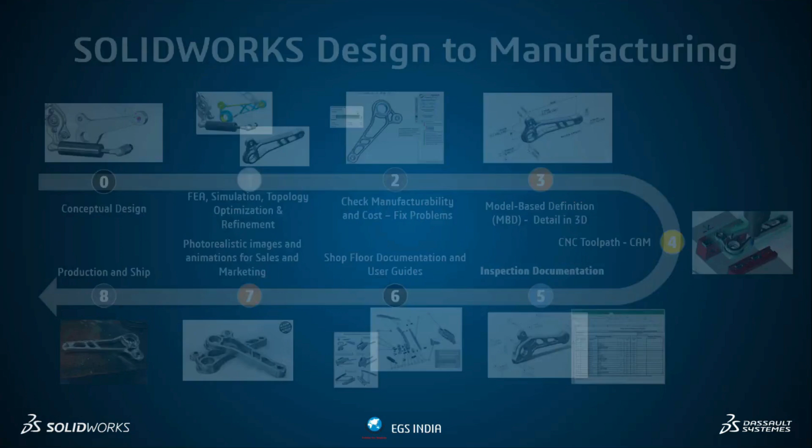And then we have the product we are going to see today, SOLIDWORKS Composer, which helps us to build multiple levels of technical publications such as user manuals, instruction materials, assembly instruction materials, interactive contents, training manuals, etc. So we also have our marketing tool. We call it SOLIDWORKS Visualize, which helps you to create photorealistic rendering images. So overall, for the entire cycle of product development, we have the solutions with us. So we serve across 11 industry verticals.

So today's agenda is going to be how we can maximize the documentation workflow, and how we can improve the timing in that. So some of the bottlenecks we face in the documentation phase of product development, and how SOLIDWORKS Composer is going to help you solve all these small struggles and create better deliverables in a very short amount of time. So I'm going to showcase a few capabilities of SOLIDWORKS Composer, and then we can see the business impact it creates throughout the session. So let's start today's session.

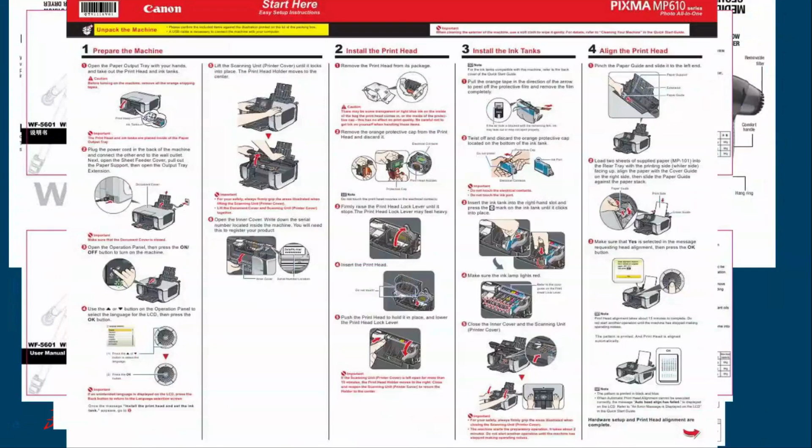For the user manuals or the content, technical publications they are creating, some people take screenshots or type the entire thing. They use different tools for taking different images. Like we may need vector-based images, we may need images with proper instructions built into it. So we might use different tools to build all this.

And then let's see, if there is a scenario where any engineering change has been passed through, you have to go and reiterate everything, verify everything from the beginning, and do the entire manual once again. So the entire previous iteration is not useful anymore. This is a very painful situation.

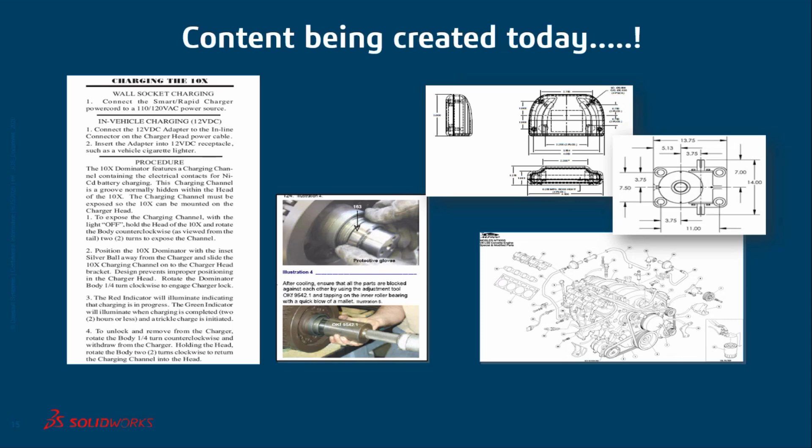This is the light at the end of the tunnel. By cutting out the duplicate work using Composer, teams are getting their product to market three times faster than the traditional manual way. Using Composer, you can create all these technical deliverables in a much faster manner.

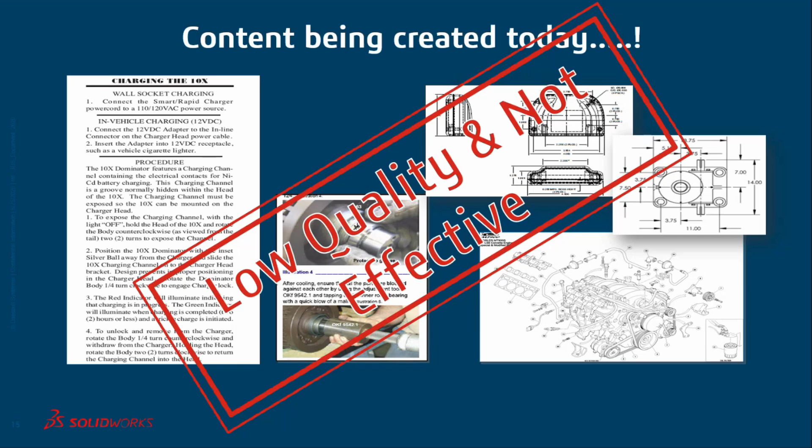So why create low quality work that's not so effective when change comes? All the hard work we put inside our documentation is completely going to waste. So why deal with so much pressure, and why do all these things, when we have SOLIDWORKS Composer?

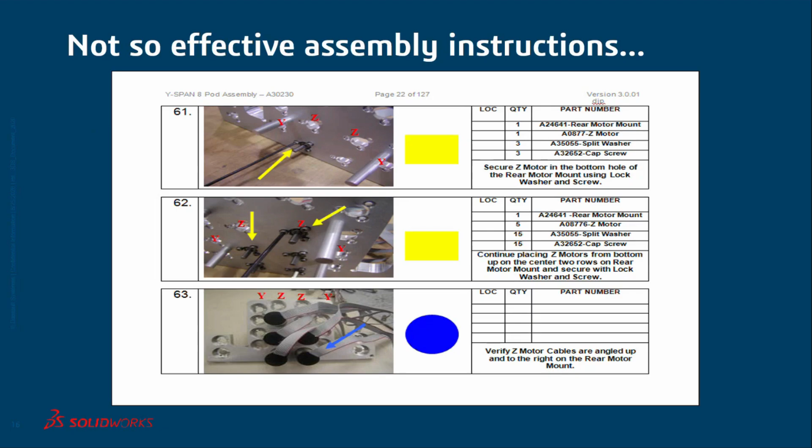So we might develop different assembly instructions based on some photocopies or photos we take. The material we provide inside this kind of documentation will not always be perfect, and it can't always be reused throughout all the documentation of that particular component. So we might have to redo everything from the start.

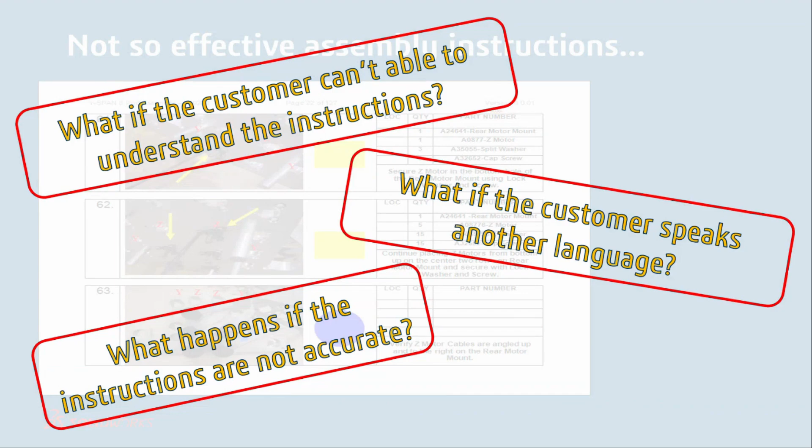So what if our customers can't understand the instructions we provide? What if our customers speak some other language? What if the instructions we've given are not understandable or not so accurate? The customer struggles. So how do we solve it? How do we actually leverage our 3D data beyond our design usages? How do we do that?

There comes SolidWorks Composer. This is not just another CAD tool. We are all very familiar with CAD tools, but this is not just another CAD tool or just any other tool, but your 3D communication powerhouse. It breaks down the silos between engineering, documentation, and the shop floor.

First, Composer acts as your single source of truth, whether you are designing in-house with SolidWorks or receiving third party files, like neutral format files or CATIA files from your vendors across the supply chain. Composer can import over 30 different formats. The rule here is very simple: no remodeling ever. You don't need to remodel your entire design just to match your requirements for your technical deliverables.

So you leverage the exact 3D data the engineers already created. So who actually makes manuals? Usually it's a technical writer, a marketer, or sometimes the design engineer himself. With the help of Composer, these people work directly with the 3D CAD data, but you don't need a 3D CAD license for this, especially if that person is specifically a marketer or a technical writer. This means your engineers can keep designing without being interrupted.

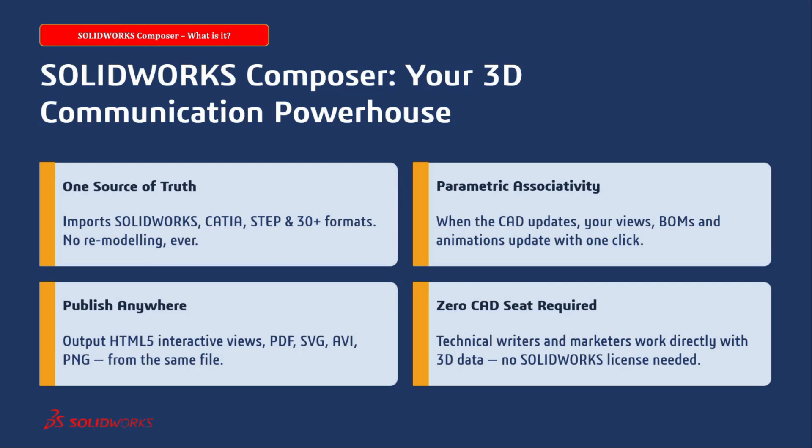You don't need to take any extra screenshots for your documentation, or jump between different websites to create photorealistic or vector-based images for your applications. Everything is available in this single platform.

Let's start with each functionality we'll go through. The very first functionality a marketer or technical writer needs is a detailed exploded view, so let's see how it can be created inside SolidWorks Composer.

As you see, you can easily create exploded views, drag and drop exploded paths, and also link your bill of materials in a very interactive manner. Let's see one by one.

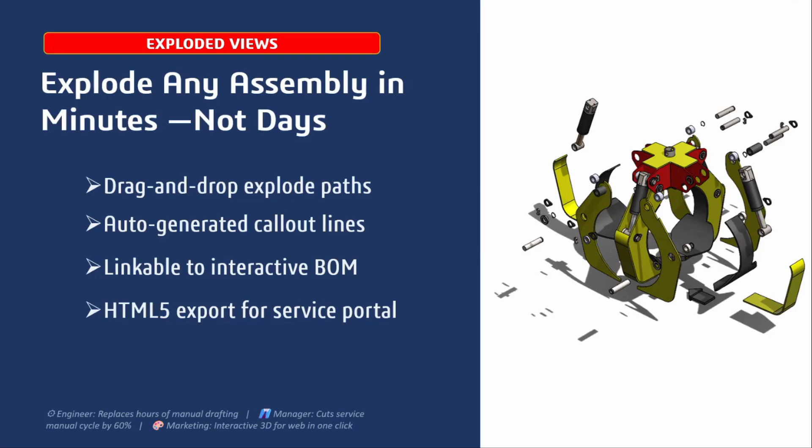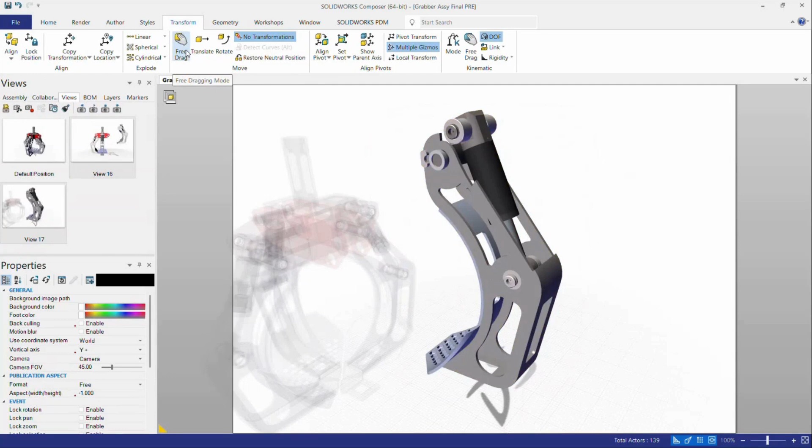Here I'm opening a CAD file that's been delivered to me. I can easily switch between different views, which is very useful when working with CAD data I have minimal knowledge about. You can easily interact with your CAD data, detect each component, and create exploded views in no time.

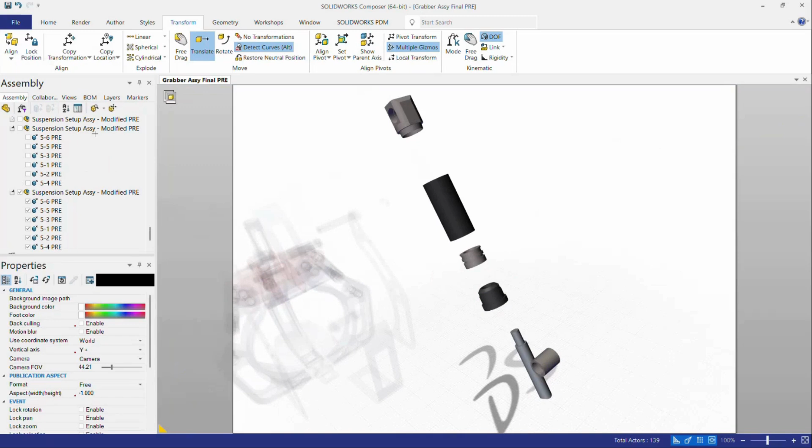Imagine trying to create an exploded view detached from your existing CAD - if you're using a CAD and want to create an exploded view, it's a big workflow requiring lots of jumps between different applications. Here, everything you see is completely associative, and you can create exploded views in no time.

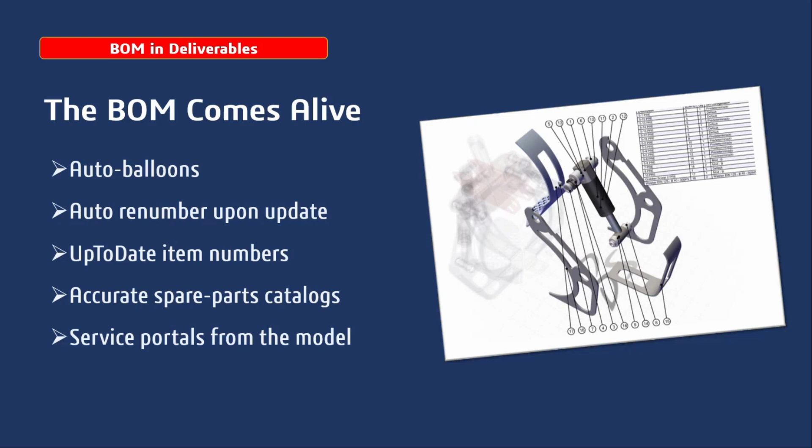You can attach your actual BOM here with your actual component, generate the bill of material ID, renumber your items, and accurately map all the spare parts across different teams in your organization.

So I've created a set of images for my actual Word document, just leveraging my CAD design to create a bill of material in my documentation. I'm selecting all the components here, and within a few clicks I can generate a complete usable bill of material with whatever property I need.

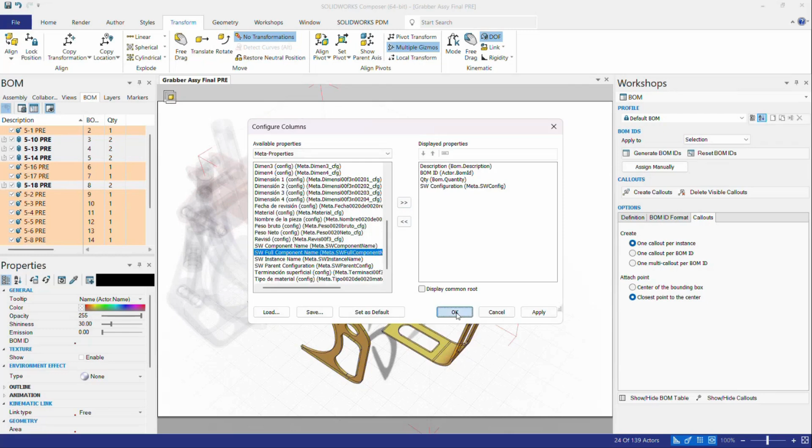If I need material properties inside my bill of material, I can add that. If I need to know the status of a component - whether it's a buy component or make component - I can simply add that in my bill of materials in a very simple manner.

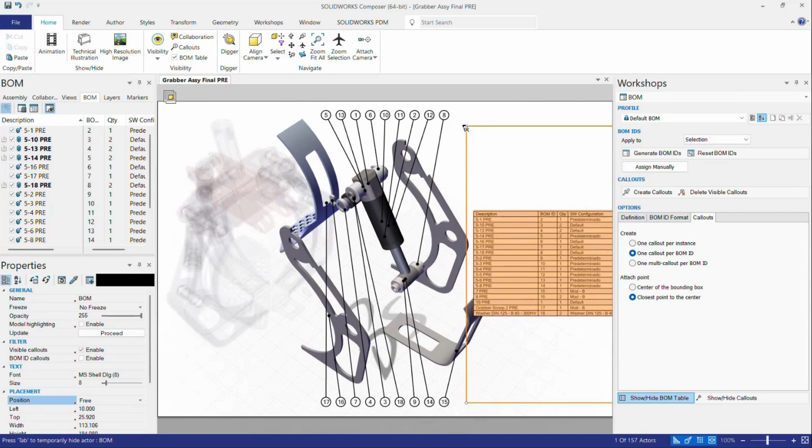I can also automatically balloon those components based on the numbering I've given in my bill of material. So within no time I can generate a complete exploded view, a detailed bill of material for that exploded view, and the balloonings for that particular sub-assembly I've been creating. This is very much useful.

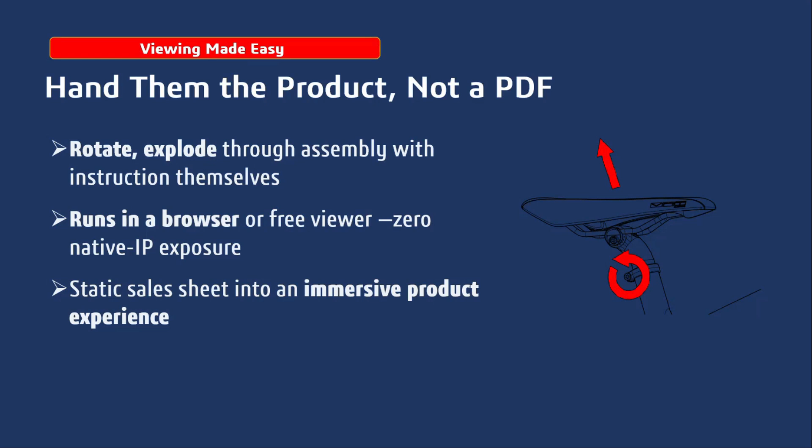So you don't just go and give a PDF or a simple printout or booklet containing instructions for that assembly - you're giving the exact outline or working of the product into your users' or deliverer's hands. You can rotate and explode through assembly instructions, and run the entire output inside a browser or a free viewer.

So basically what I'm doing is publishing my design in HTML format so anybody in my organization can view it inside their browser or handheld device to understand the product the way we want them to. If it's a sensitive product with very high levels of tolerance, like an assembly instruction manual, we have to be very careful with our deliverable.

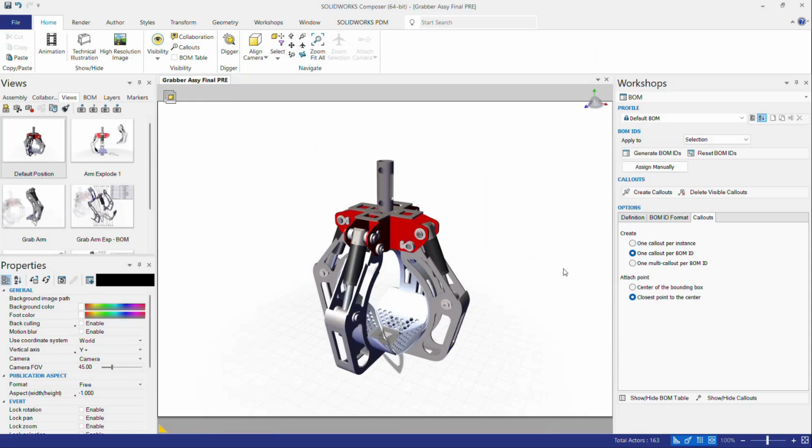So instead of just giving an additional document that illustrates how to assemble this particular assembly, which might not provide enough clarity, you can give these kinds of deliverables to your shop floor people or others working with these kinds of documents.

You can also create interactive content like this. As you see, I am projecting a whole product which has 4 different drawings, and for each drawing I'm presenting it with a bill of material. Each drawing contains a part number, description, and quantity.

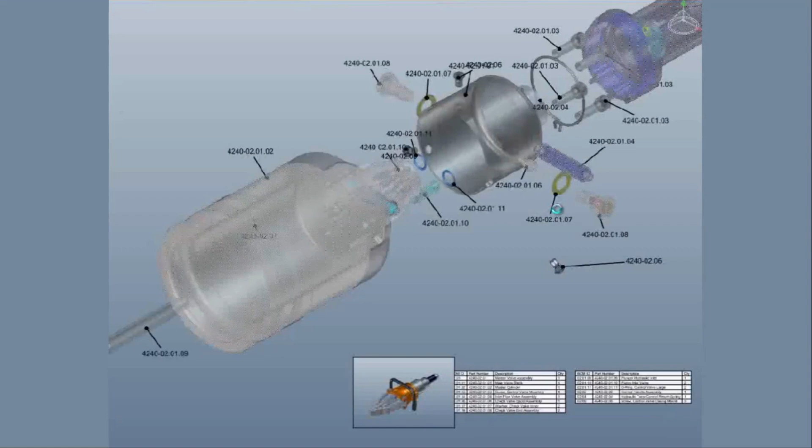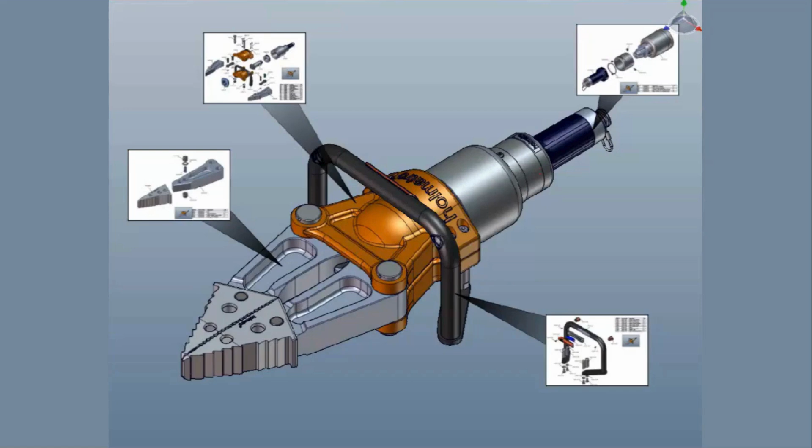I can switch between products, or switch from the assemblies to sub-assemblies, up to the basic part level. So I can view everything in one environment, even in my handheld device. This is very useful and handy when it comes to providing someone with assembly instructions or any kind of user manuals. You can create both user manuals in a printable format, and also create these kinds of videos in SolidWorks Composer.

Upon creating videos, we might need animations. In SolidWorks Composer, you can completely edit your animations, your video, inside Composer. We have all the functionalities required for video editing, especially keyframes, camera movement, lighting, and the motion paths of parametric components. If you are capturing a particular movement inside an assembly, you can capture that inside SolidWorks Composer.

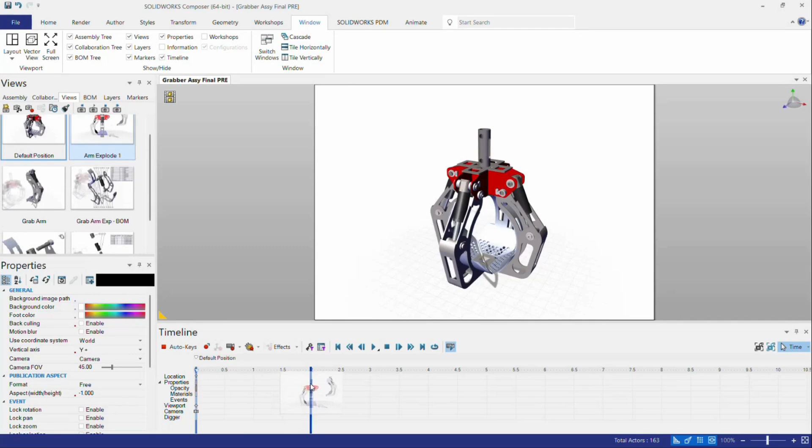Apart from all this, everything is completely associative. So when the geometry updates, your animation paths, your camera views, everything you've set inside your Composer document automatically updates. So basically what I'm doing is trying to create a complete animation with the images I've created inside SolidWorks Composer.

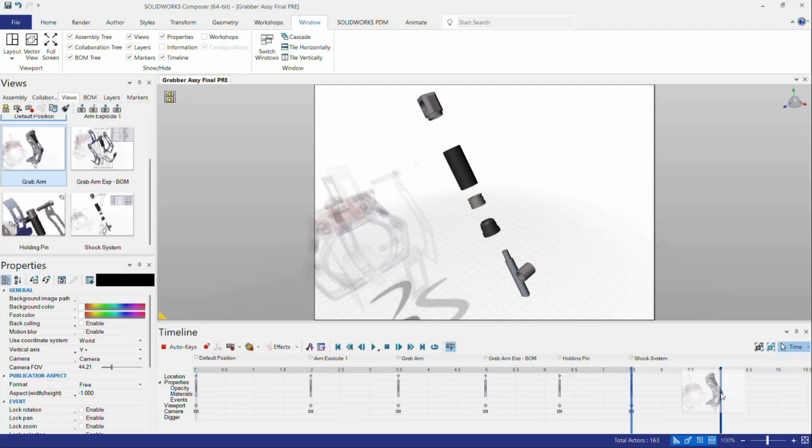As you see, I'm simply clicking and placing my images in different time frames of that particular assembly animation. After placing all this, I can decide the duration for each and every frame I've created. Creating your photo stills or frames is very easy inside SolidWorks Composer. When creating animations, the frames, the key photos you have created, help in a major way. I can create these kinds of animations, which also include the bill of materials inside the instruction.

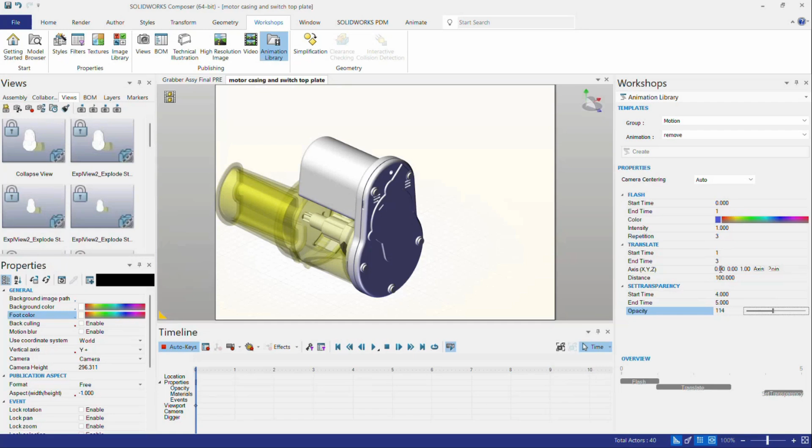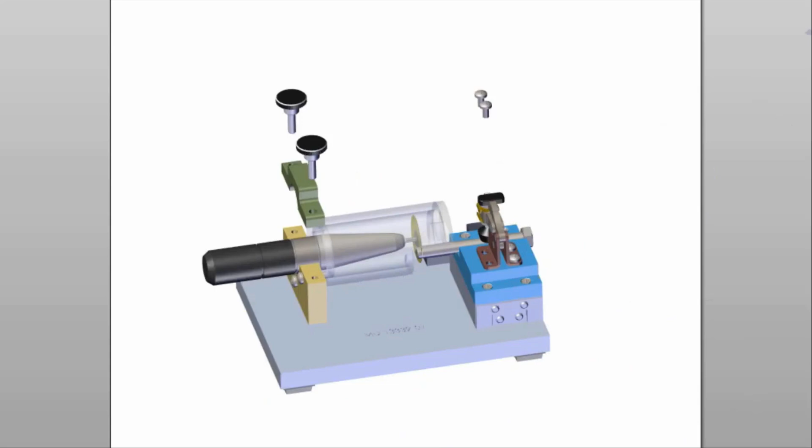This is very much handy. We can also simulate or iterate actual movement of components inside an assembly based on the time frame or key time frame we are adding. Based on my input, I can create different kinds of animation, from very simple animation to a complete instruction video, as you see here. So I'm just opening this particular component to showcase the components inside this particular casing. You can create these kinds of animated outputs inside SolidWorks Composer using our animation pane.

You can also render photorealistic images from Composer itself, for you to use inside your documentation purposes.

So we already talked about this. We might face design changes in the design phase itself, or when the product is manufacturing, they might give some feedbacks or reviews. Based on the feedbacks and reviews, the engineering team usually does some minor changes in those products.

So without Composer, if you receive any ECO notification, you have to manually identify which views or images in your documentation have changed. You have to redraw or reiterate your entire exploded views. You have to re-verify your bill of materials completely. If any part number or entity that belongs to the BOM has changed, you have to re-verify and update that.

You have to regenerate all the call-out lines, and republish that entire document from scratch. This obviously takes a lot of time, because you're redoing an entire document which you already created for the previous iteration.

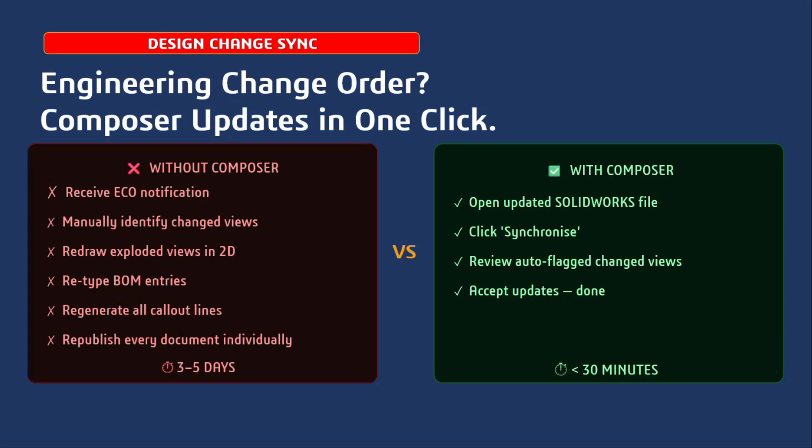Let's see what we can do with Composer. Simple - you just open your file and click synchronize. You review what changes have been made inside and outside the actual documentation you've created. When you verify it, you just click update, and all the documentation, all the images, all the output files, project files, which contain all the animations - everything is updated across the board, consuming very minimal time compared to our manual traditional workflow.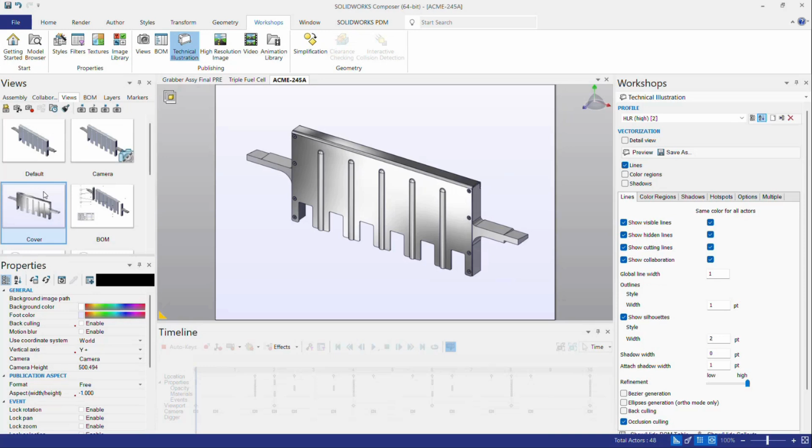So I'm doing the same thing here. I'm just updating my older version of the file with a newer version, which hardly takes a few seconds. My bill of material is updated, all my views are updated. So all the snaps I've taken for my PDF document or the user instruction manuals have been completely updated across the board. Not only here, but also on my Word document. I'll come to that.

So we might use lots of vector-based images or rendered images, which we struggle to get from different platforms. We create images that we require from different platforms or different applications that we use, which is obviously time consuming, and nothing in the traditional environment is completely connected. So if you are changing any single thing, you have to redo that entire process.

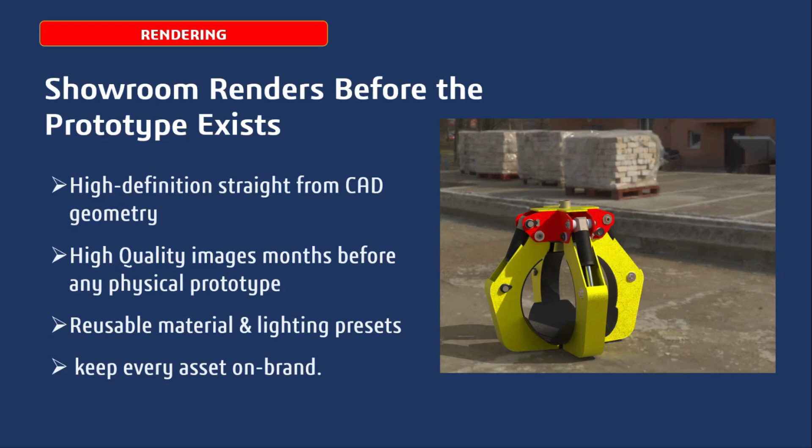So we have rendering functionality inside our SolidWorks Composer, which gives you high definition images straight from the CAD geometry. So you can reuse the materials, you can set all the textures, you can set the lighting, background, what is the floor, everything you can set inside SolidWorks Composer. And if you are following a particular colorway or a particular look for your brand, you can save it as a template and reuse it.

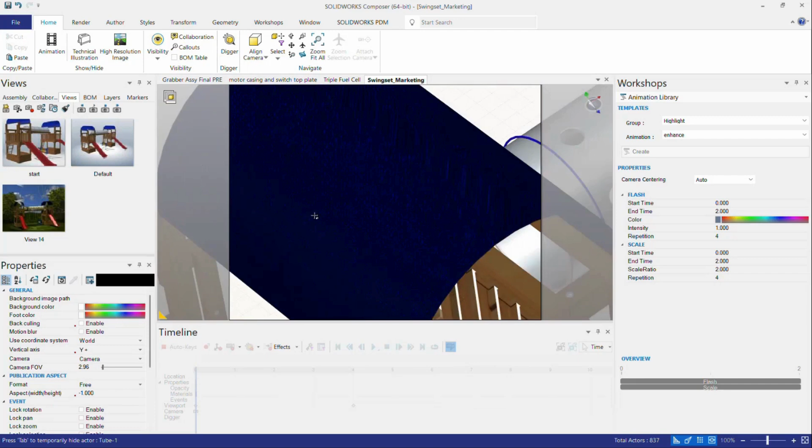So I'm just importing a particular texture on a component that I've been using inside my SolidWorks. I can edit that texture. I can fine tune what is the actual requirement for my image here in this environment. So not only this, I can determine what is the actual lighting that my scenario goes through.

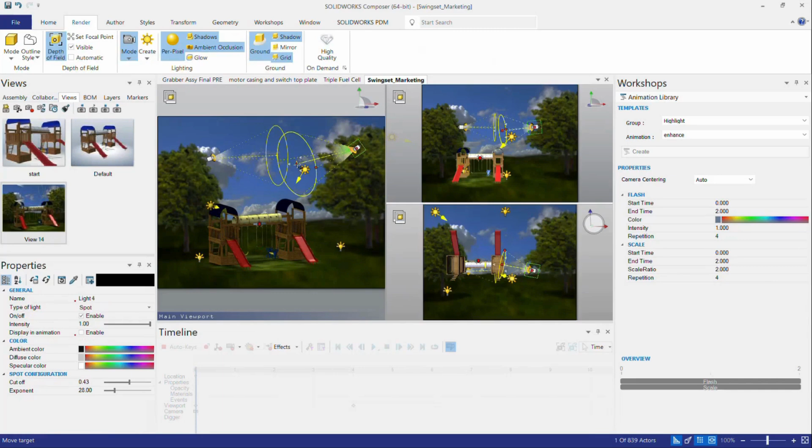So as you see, I can switch between different views and I can adjust the lighting that I'm setting here. So based on the lightings, based on the textures, the depth that we can give, we can obtain high quality rendered images from SolidWorks Composer.

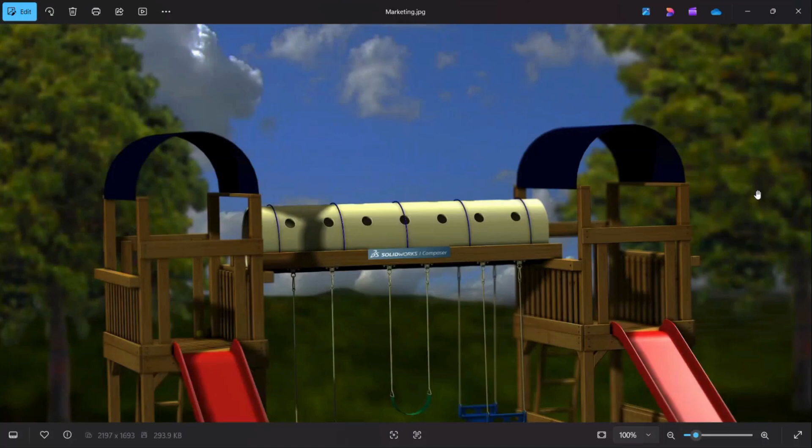This is very much useful because everything you do is completely associated with our CAD file. So if your CAD file gets updated, all your rendering, all your documentation, all your animation videos or project files, everything will be updated across the board. So with one single source, which is your CAD file, you can get all the industry standard outputs.

Let's say it might be PDF, it might be instruction video, or it might be interactive 3D presentable website content. Everything you can create and publish from SolidWorks Composer. So one single source feeds engineering, marketing, training materials, and web contents. So this completely ends the effort of maintaining parallel asset pipelines.

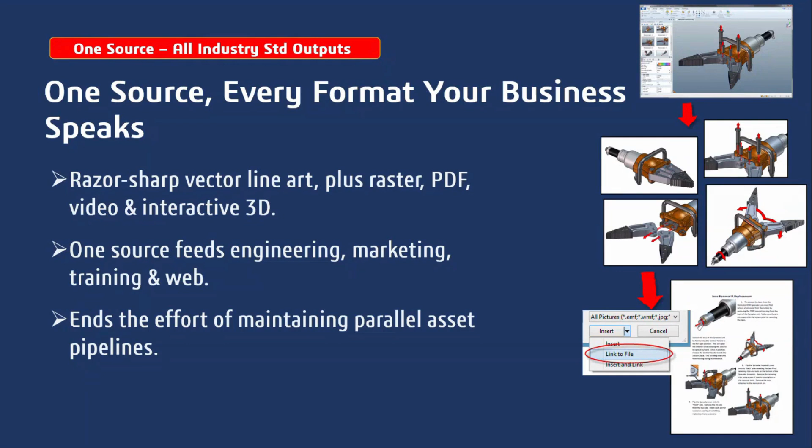So if you are maintaining different assets for different environments, like if you are posting web-based interactive training videos, or web-based manuals, or creating your actual manuals in hard copy, you can maintain all this in a very effective and easy manner.

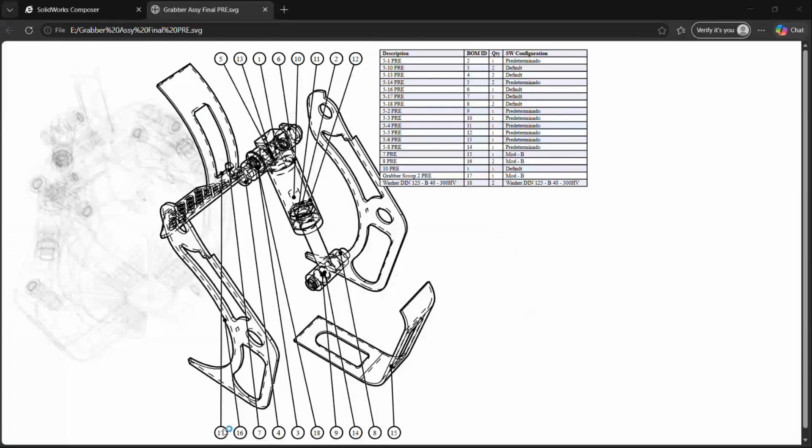So basically what I'm doing here is taking vectorized images from my SolidWorks Composer itself. I'm simply saving the image I need, and I can get this kind of SVG output with the bill of material, which also highlights based on what you click inside that environment.

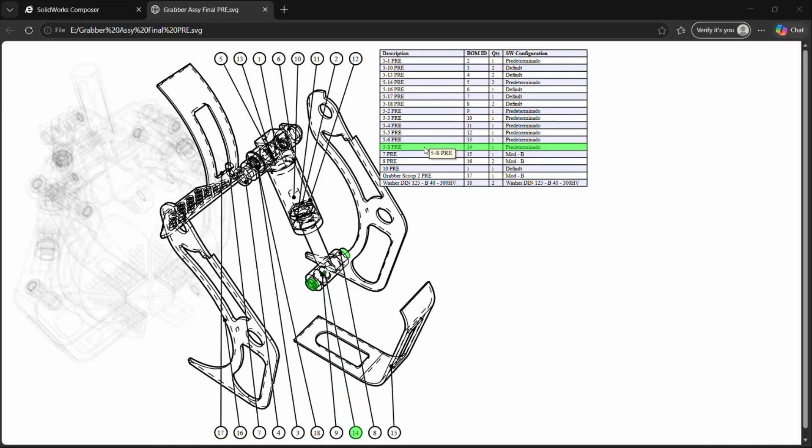So this is completely possible, and this is a very easy process using SolidWorks Composer when we are creating web-based contents. This will be very helpful when you are creating training materials, assembly instruction manuals, which have all this information packed into them. Because it is associative, it will update when any changes occur to your actual CAD model.

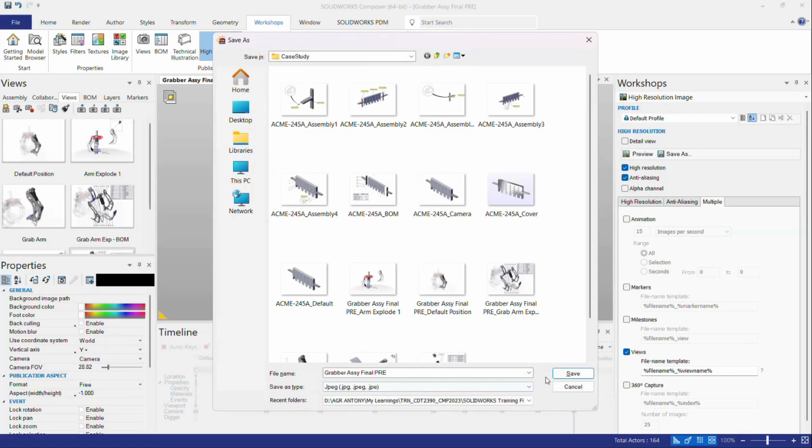And not only vectorized images, you can also create different images that you pair with your actual document. So let's say if you are creating a technical document for a particular SPM or an assembly, you can link your image inside your web document itself. So I'm doing that here.

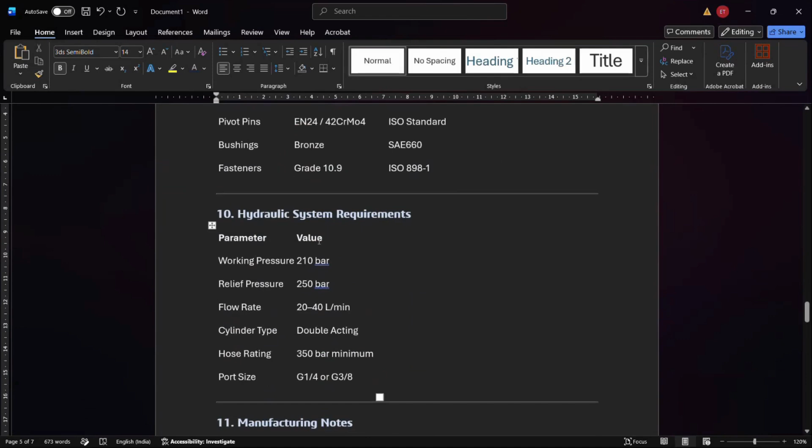I'm just linking my image inside this specification document, which has all the bill of materials, material standards, and system requirements based on every functionality that I have engineered into that assembly. So when I'm inserting a file or an image, I'm inserting it with a link which always keeps this document linked with my CAD file and my Composer project file.

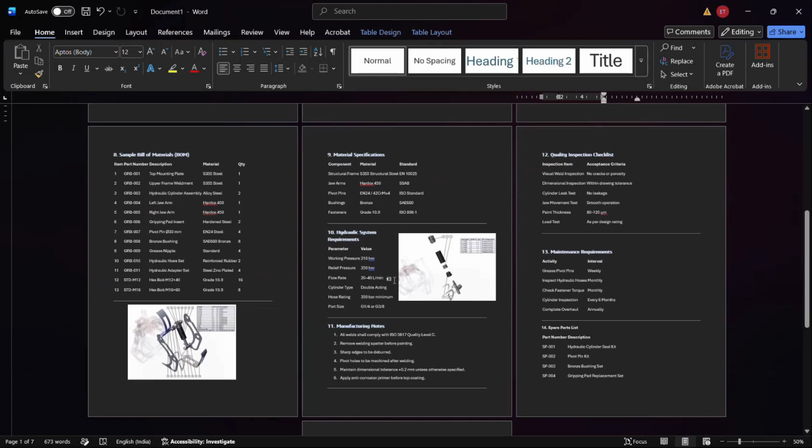So when it gets updated, all my Word files also get updated. So you don't need to go and do all the updates manually. So you can also create this kind of interactive web-based content.

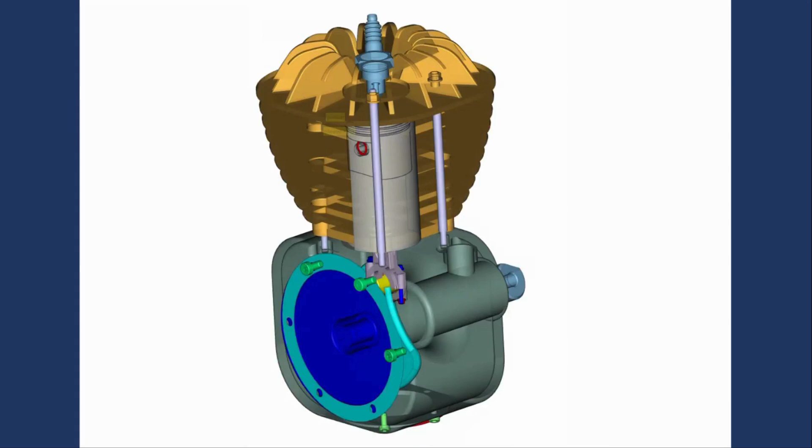So as you see, in this video we are trying to explain how you can assemble a particular piston, and also a complete assembly instruction video which contains all the names of the particular components and how you can assemble in the right manner with all the detailed views that are required for this particular application, which requires high tolerances and high

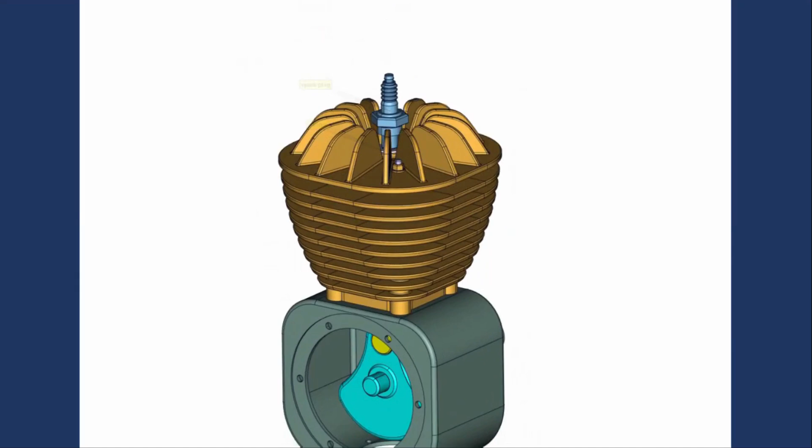being very careful. Because this has very high tolerance levels, we have to be careful when we assemble it. So every instruction is highlighted and every instruction is completely showcased in a very understandable manner inside SolidWorks Composer. So using SolidWorks Composer, you can create these kinds of outputs.

So what is the ROI that we can witness when we use SolidWorks Composer? We can witness 60% or more than 60% reduction in documentation cycle time. A considerable reduction in dealer training costs, because we might be using different applications. Different applications require different experience for that particular working environment. We can neglect that.

So we can push our product for the marketing launch or for manufacturing or assembly in a much faster manner. And then we can also create part catalogs and training-based documents in a parallel manner. So you don't need to invest your time for every single documentation in a specific timeline. You can do all these in a parallel working methodology, where design engineers can stop rebuilding views after every engineering change that has been issued.

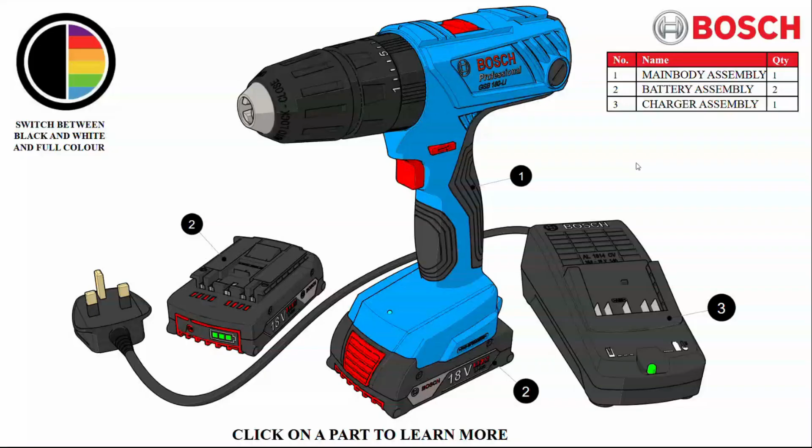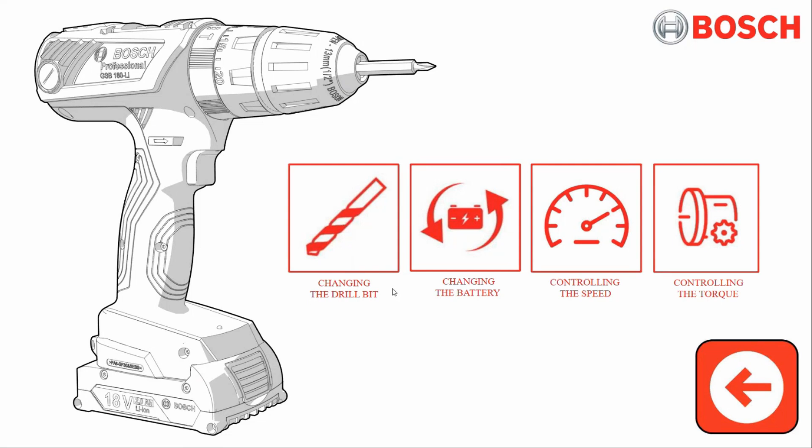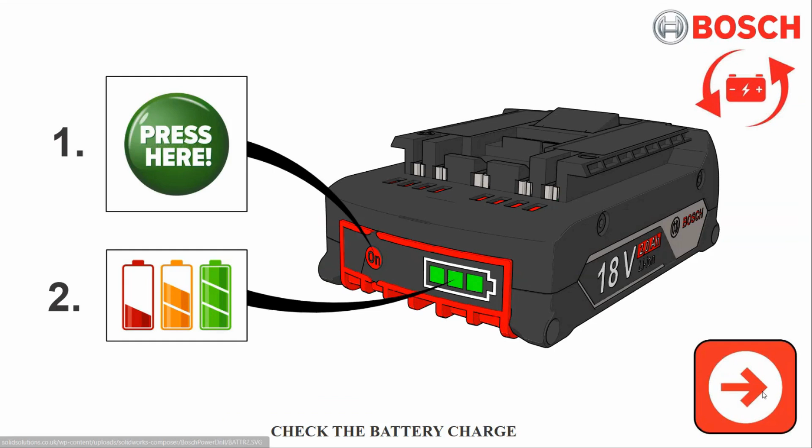So as you see, this is a web-based content. We can create this kind of interactive web-based content using SolidWorks Composer. This has all the requirements that we can showcase inside our website. So we can add the usage instructions inside our web-based attachments that we have been creating using SolidWorks Composer. So let's see one of the tutorials. This is a tutorial, an instruction manual that we have provided for changing batteries and all.

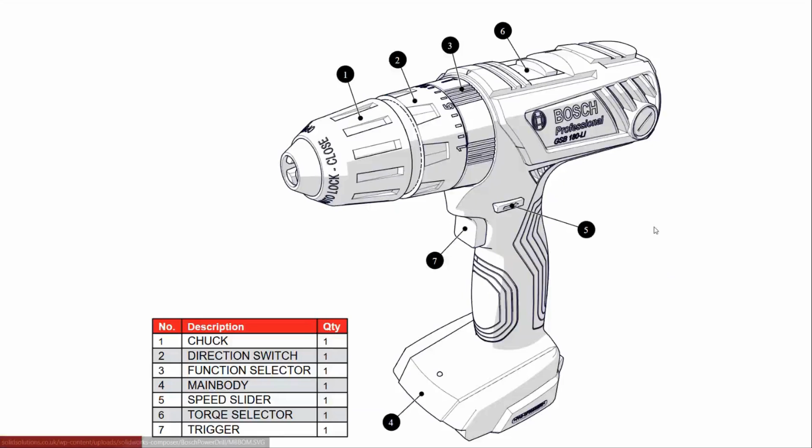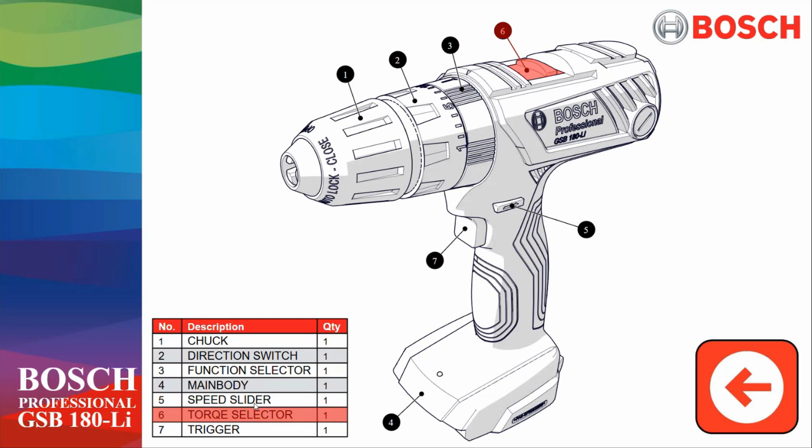So basically these kinds of outputs we can create using SolidWorks Composer. We are not doing anything from scratch. We are just leveraging our existing design data that we have created for our manufacturing purposes for documentation creation, marketing, and training content creation inside our organization. So this is one simple example.

But a small recap of what we have seen. We can completely leverage our design data. In this case, if we are developing a SolidWorks assembly, we can import that inside Composer. Upon importing it into Composer, we can create different types of views, which also involve all the exploded views, the instruction sets that we are going to create, and all the bills of materials that we can

attach. Based on these instruction views, we can create training animations, and we can also create marketing renders and web-based applications based on our requirement using SolidWorks Composer.